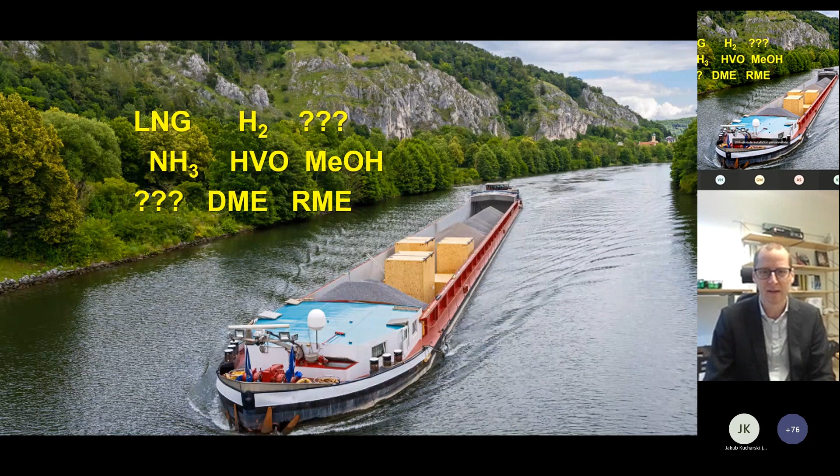Very quickly introducing myself, just to highlight some of the background this is coming from. My name is Sebastian Verhelst. I'm a professor at both Ghent University in Belgium and Lund University in Sweden. I did my PhD on hydrogen engines, but we also worked on renewable fuels such as methanol, ethanol, straight vegetable oils, biodiesels, animal fats even. Basically anything that will burn in an engine and has a renewable origin, we've looked into, just to give you a view from a fairly broad background.

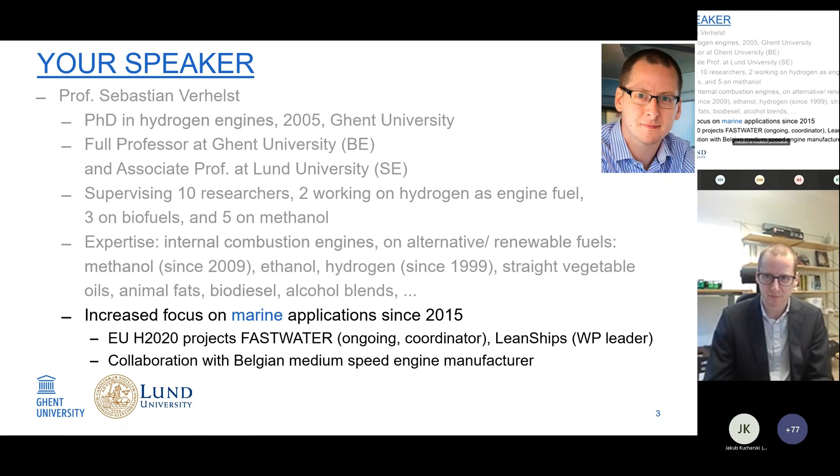Now, what do I have in store for you today? I don't want to throw a lot of data, a lot of studies at you. I would rather focus on a set of very basic tools and insights that I hope will serve you right, to be used as base criteria. When there's yet another alternative popping up, how do you place that versus the others? With just a couple of base criteria, you can already get quite a long way.

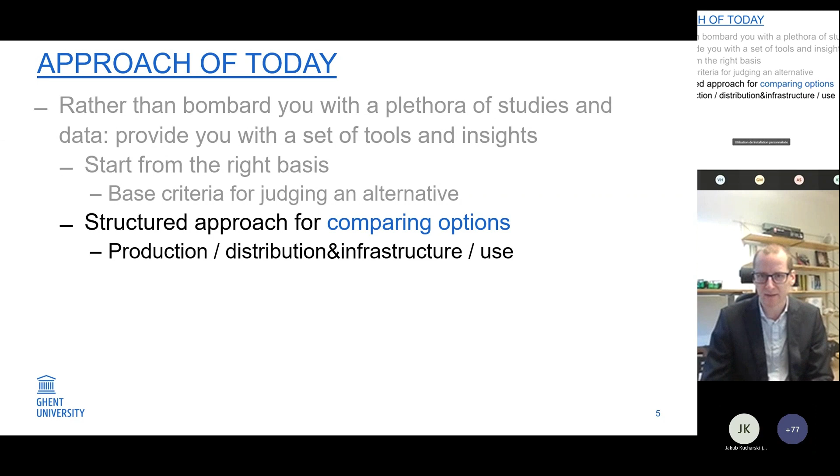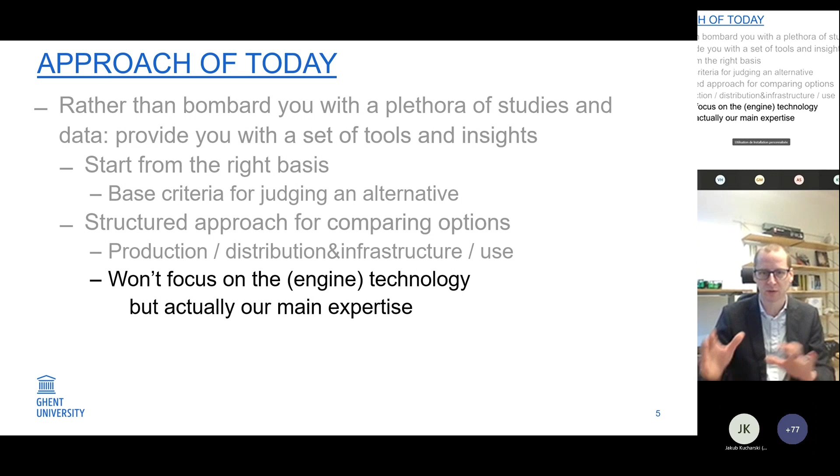So I will be putting forward a structured approach for comparing options, and I'll go into that in detail. I won't be focusing on engine technology, which is actually our main expertise - I'm an internal combustion engine guy - but these days you have to be very aware of what the fuels world is doing and what the energy world is doing. So this is how it all ties in. And rest assured, this is purely objective, I hope, so there's no commercial interest here whatsoever.

So let's get started, and let's get started from the basics. We've already heard it a couple of times today: why are we here? We want to set out the path to sustainable shipping. That means, to me, that we really need to think long term. Although long term, as we've heard, is getting closer and closer, still it's important that we look ahead, think about where we need to end up, and that we think big picture.

For shipping, for example, we will need an energy source - now we know that as being a fuel - or renewable energy sources. We need an energy carrier, and we need an energy converter to power our vessels. So if we think long term, we need all of these three things to match a number of base criteria. One obviously is that all these things should be sustainable. So the energy source that we will be relying on in the distant future, or maybe not so distant, to power shipping, must be gotten from renewable energy sources such as solar, wind and bio. But also importantly, everything that goes into producing an energy carrier - a fuel, for example - or an energy converter, be it a fuel cell, an electric drive, or a combustion engine, all of the materials that go into making these things, we need to make sure that they are used in a closed cycle.

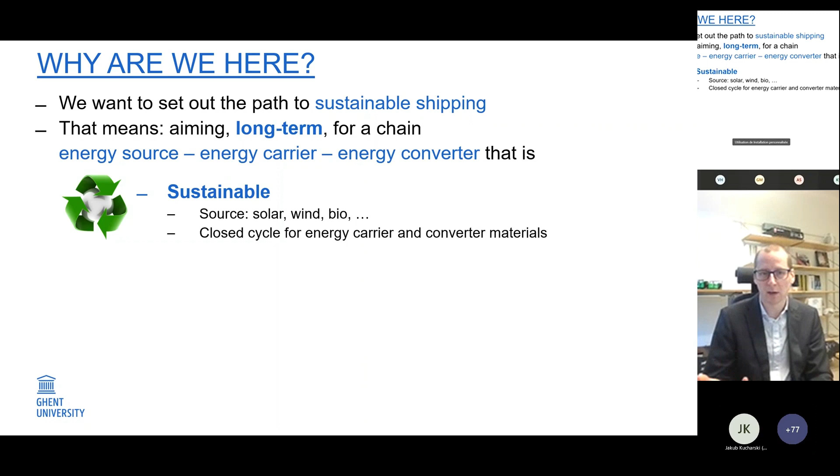That is not enough yet. Sustainable is a very important criterion, but equally important is scalable.

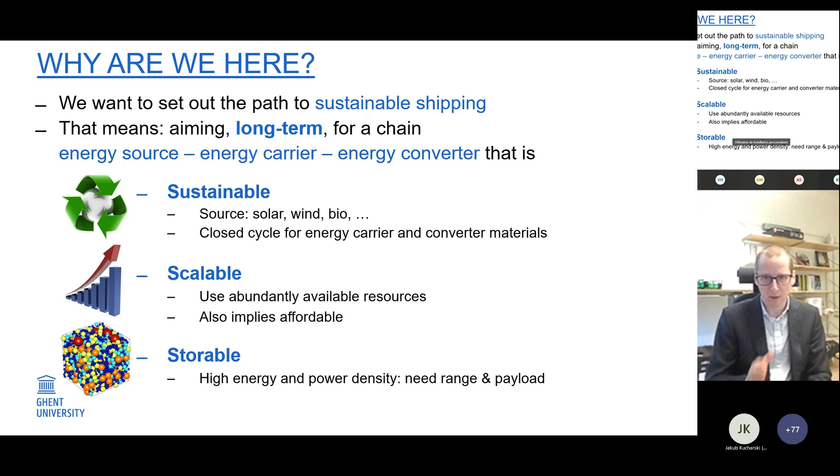We know about the tremendous challenge we have ahead of us. All of the materials that we're going to need to build these things, these fuels, these engines, these ships, we have to make sure those materials are abundantly available, because that goes hand in hand with affordability. And as soon as you're talking transportation, obviously storability is very important. We need high energy density of the energy carrier, of the fuel. We need high power density of the energy converter, because we need to ensure range and payloads. So sustainability, scalability, storability sounds very simple, just these three criteria. That's what I call my triple S criteria to assess any option, but that gets you quite a long way. And I'll touch on some examples of that.

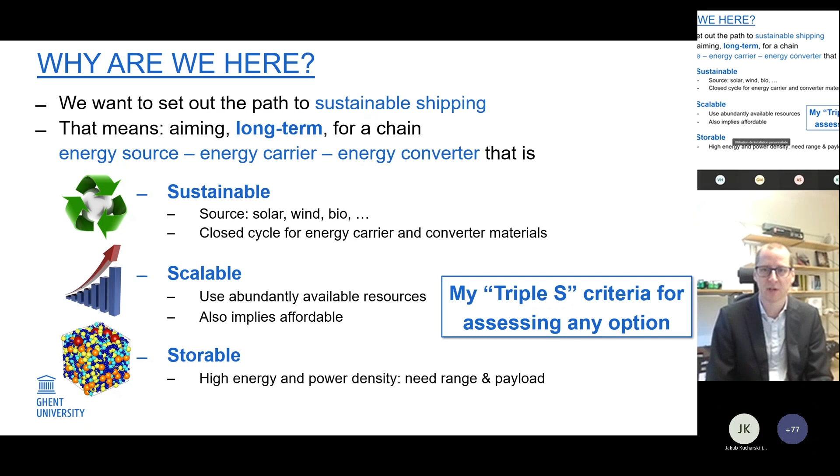So first one of this chain was energy source, and first criterion is sustainability. So let's check sustainable energy sources. Well, we know what those are. We know that we have biomass, hydropower, tidal energy, geothermal, wind, and solar.

Now let's think of the second criterion: what's the scalability of these things? It's very important because we need to know in which of these things to really invest. If we look worldwide at the maximum potential of something like biomass, we get to the order of 7 terawatts of continuous power that we would be able to generate from that. That's a huge number, and a number that is meaningless to us unless I give you a benchmark figure. The benchmark figure is that we're currently at around almost 20 terawatts worldwide of power that we're using. So biomass can contribute to that, but it's quite some way short of what we actually need.

Hydropower is a very similar number, also about 7 terawatts. And in this case, we're just looking at the theoretical potential, not currently worrying about what that would mean for nature or for moving people or whatever - just the theoretical potential, because that gives us some pointers. Tidal, order of 14 terawatts, geothermal, order of 44 terawatts. So both look quite attractive, but both are also quite challenging to harvest. They're pretty harsh environments, quite dispersed environments, so not as easy to make use of.

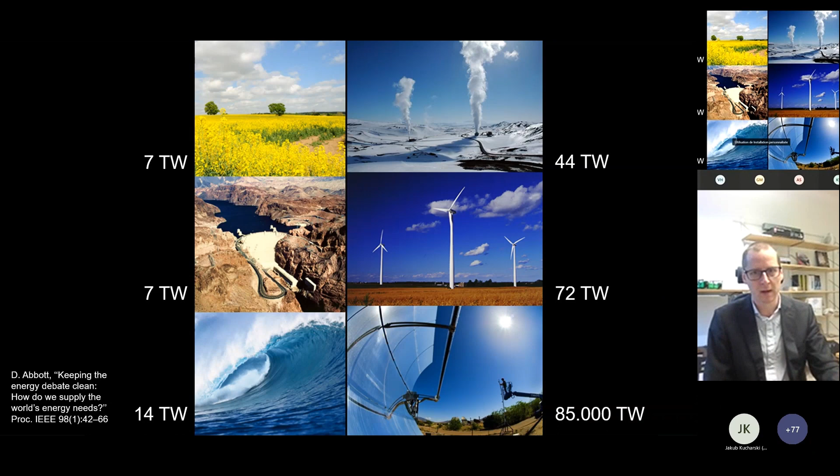Wind is getting really interesting - that gives us 72 terawatts, so that definitely justifies all the large offshore projects, for example, we've seen come online in recent years. And then let's look at solar. Solar worldwide could give us something of the order of 85,000 terawatts, which obviously is no surprise given that all the other renewable energy sources I stated here, apart from tidal and geothermal, are basically just highly diluted forms of solar energy. So that is not saying that we shouldn't make use of biomass and tidal - we should definitely do that where it makes sense. But in the long run, if you think renewable energy sources, the base load will have to come from solar energy.

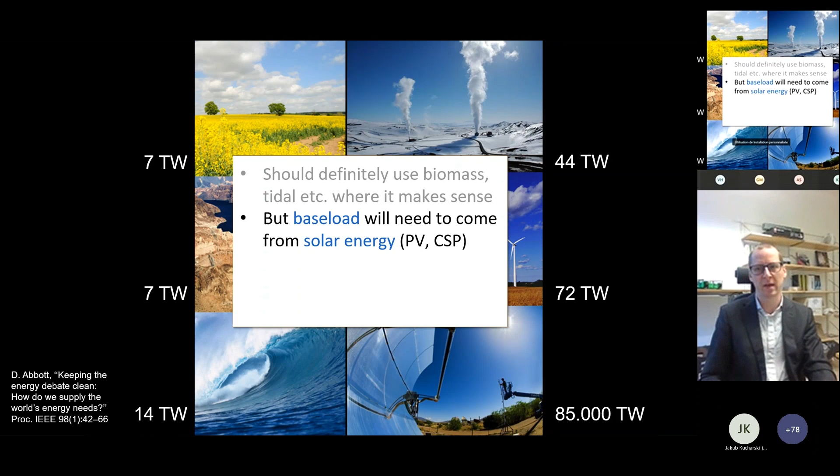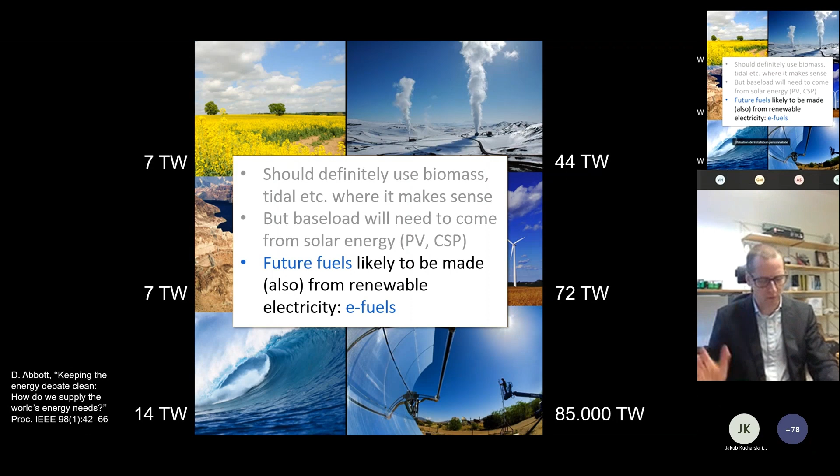And why am I telling you all of this? This seems very, very remote from inland waterway transport. Well, because future fuels will likely have to be made from the renewable energy source that is most scalable. So it seems that renewable electricity is going to be the most scalable renewable energy source. And thus, if you link fuels to that, we come to the topic of e-fuels, electrofuels. So that's still a vague category - a fuel made from green electricity.

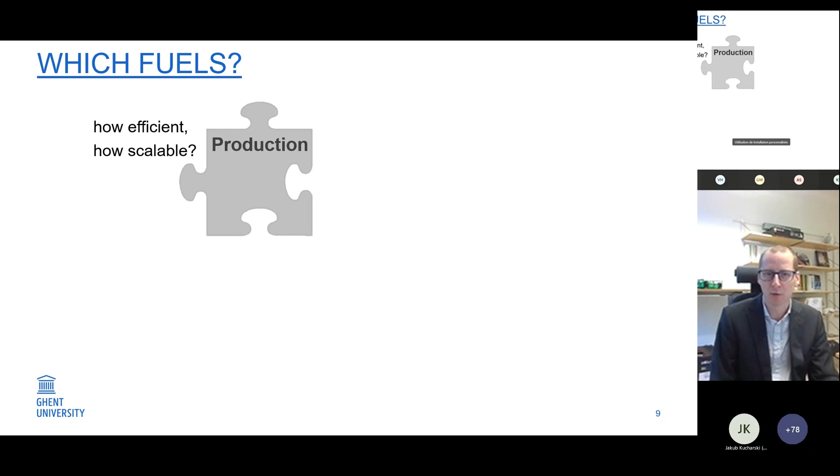But which fuels should we then be looking at? So the first tool that you can use there is to realize, or to think about, the life cycle of a fuel or an energy carrier. Obviously, you have to produce it, so then it's very important that you check how efficiently you will be able to produce that fuel and how scalable you can do that. Once you have the fuel or the energy carrier, you need to transport it to where you want to make use of it - so from the production location to the point of use. A very important property there of the fuel or energy carrier is its energy density. And I'll give you some examples in a minute.

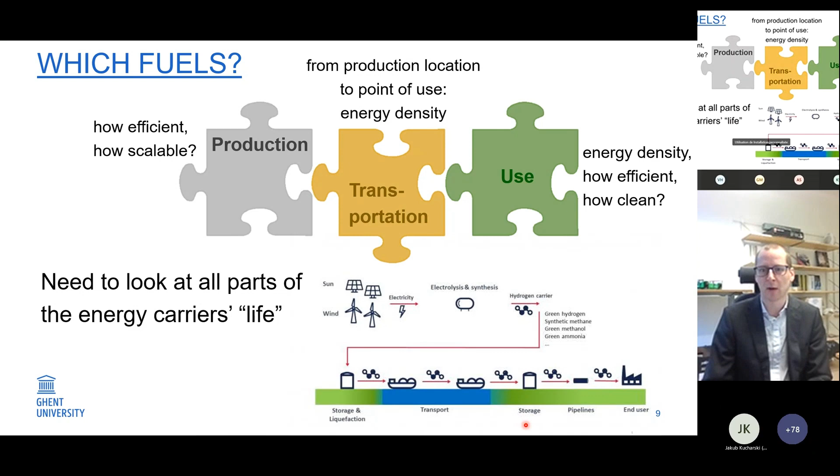And then finally, of course, what today is mostly about: which energy carrier do we want to use? There also energy density is very important, besides obviously how efficiently we can convert the fuel's energy to motive power and how clean we can do that. So just always keep this in mind with every new alternative that pops up, that we need to look at this entire life cycle - from the renewable energy source, over producing the energy carrier. Here you see a couple of them already mentioned: green hydrogen, synthetic methane, green methanol, or green ammonia. We can have different forms. We need to make it into something that is storable, transport it, store it, so that we can then bunker ships, for example.

So let's look at each of these pieces of the puzzle in turn. First piece of the puzzle: how will we produce those fuels, or what can the production insights tell us about which fuels to focus on?

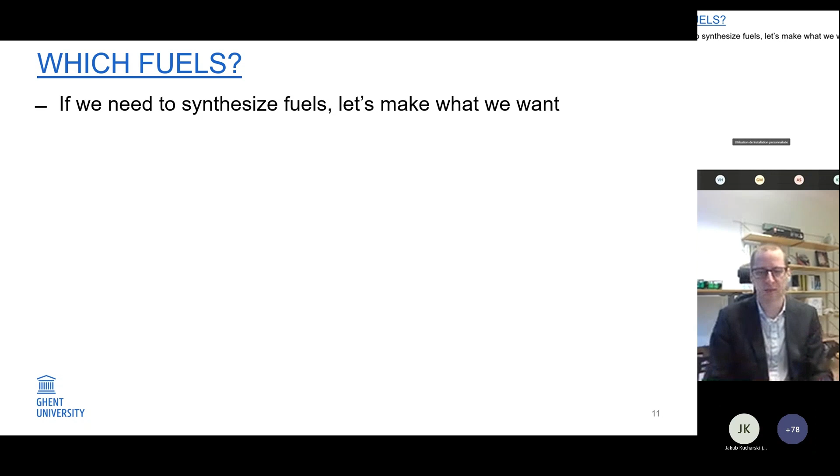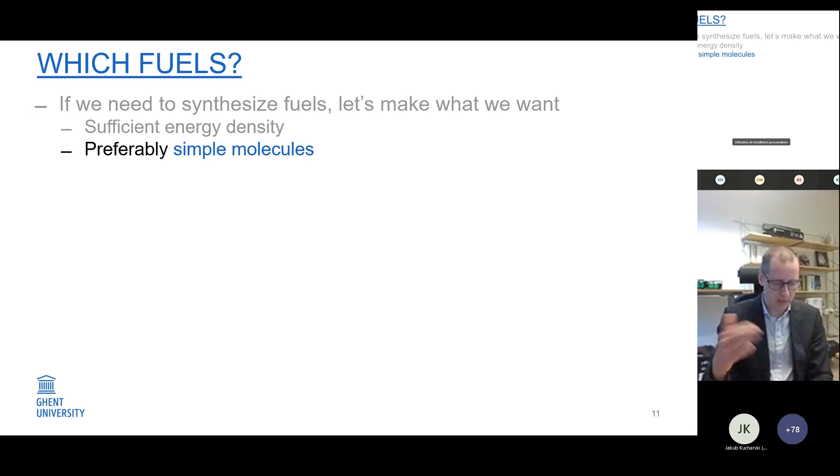First thing to keep in mind, if in the long run we will need to synthesize fuels, then let's make what we want. Energy density is a very important one for transportation. But next to that, we should preferably be looking at simple molecules. There's a reason for this typical short list of hydrogen, methane, methanol, ammonia - production is more efficient. If you think of the life cycle of the energy carrier, this is about the well-to-tank part of the equation. Let's try to make that as efficient as possible.

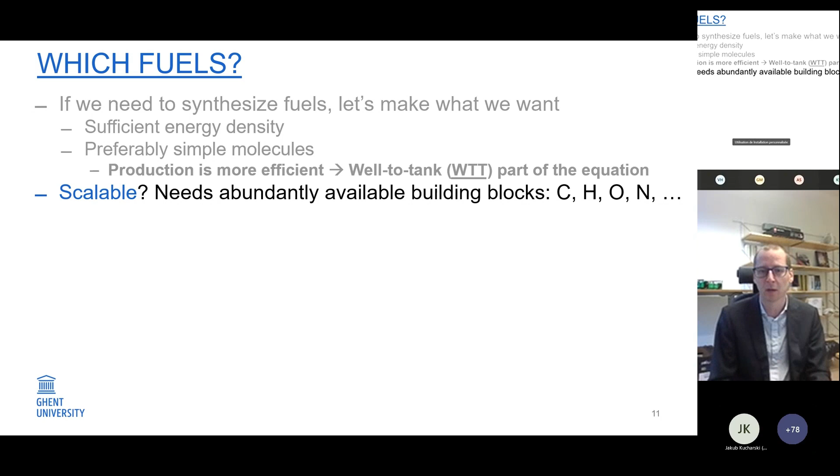Second criterion: what about scalability? What can we actually make? We have to look for things that we have abundantly available - carbon and hydrogen, oxygen and nitrogen, things abundantly available in the atmosphere or in the Earth's crust, and start looking what type of fuels we can make with those. So it's logical that you first end up with something like hydrogen, or hydrogen derivatives - methane, ammonia, methanol, or dimethyl ether.

And the list continues - you can also make things like green diesel, as some people are doing, but you can also see that the molecules are becoming more complex. The more complex molecule, if you want to build it up from scratch from the building blocks, is going to cost more energy. So it will become less and less efficient.

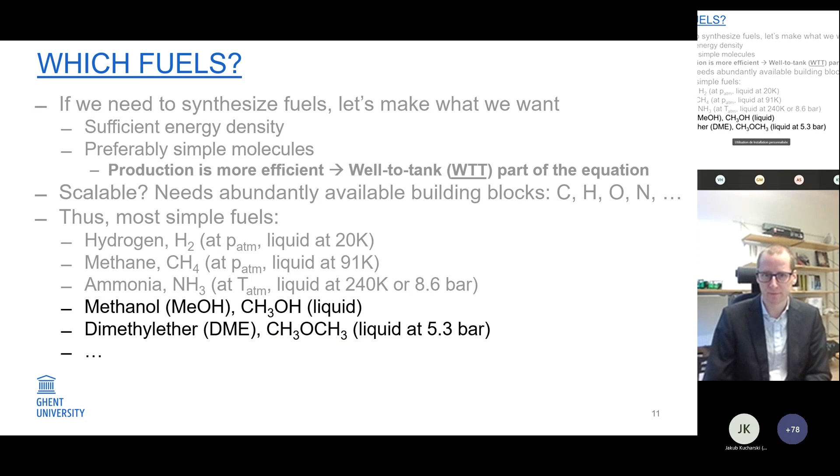So how to actually compare this list. One important distinction: some molecules have carbon in their structure, some don't. A very important question is, simply put, to carbon or not to carbon.

This is a pretty complex graph that I won't lead you through - I'll just point out some things. This is about converting renewable energy sources ultimately to fuels. We have ammonia here, hydrogen, methanol, methane here. For the ones that use carbon, we will also need some carbon capture. So how do these options compare - building fuels from the building blocks using carbon or not?

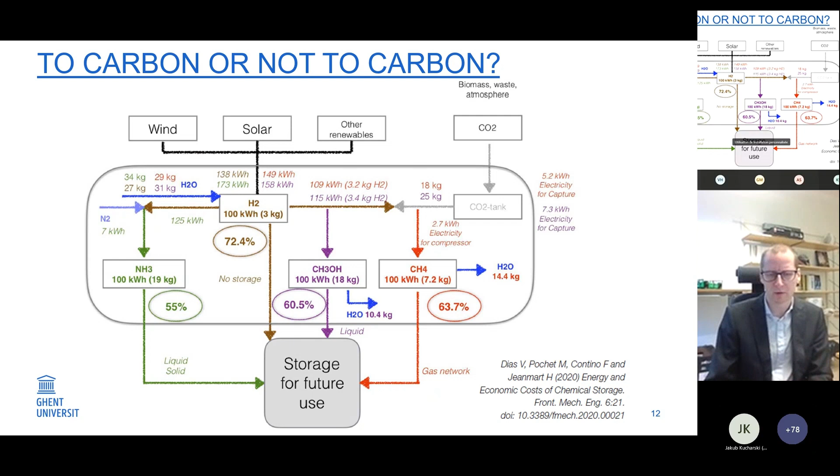So what about the production efficiencies? There were a whole bunch of numbers in that slide. The interesting thing is, if you start comparing the production efficiencies, the carbon capture does not come for free, but it's actually only a minor part of producing the fuels. It's actually the first step, producing the hydrogen, that is the biggest energy chunk. I've illustrated that here with a well-to-tank energy breakdown of synthesizing methanol.

You see that the big chunk really is electrolyzing water to produce hydrogen. That's about 70% of the energy you need to produce methanol, as the example here. Obviously you need energy to extract CO2 from the atmosphere, and the other processes to build the fuel. But surprisingly, it's mostly producing the hydrogen.

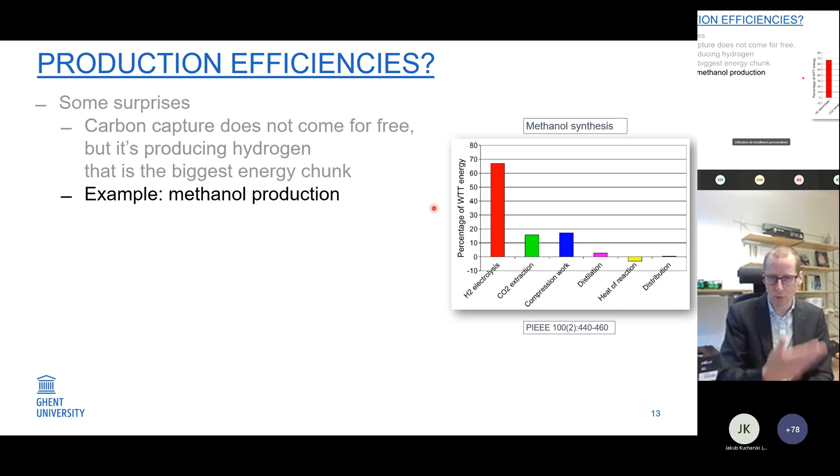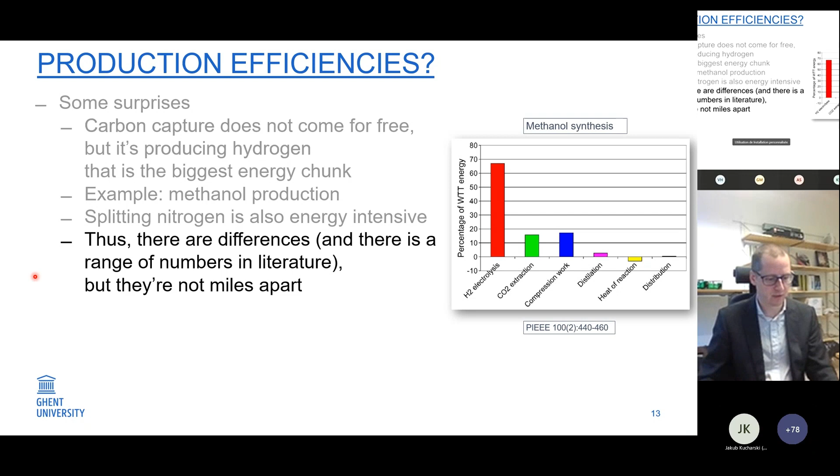So if you think of ammonia, one of the other options - nitrogen, which is abundantly available in the air, you would imagine is easier to use as a hydrogen carrier, but splitting that very stable molecule is also very energy intensive. So the differences between producing methanol, methane, or ammonia exist, but they're much smaller than you would think. Probably a more important question, whether or not to include carbon, is the future price of carbon, which was also just briefly touched on.

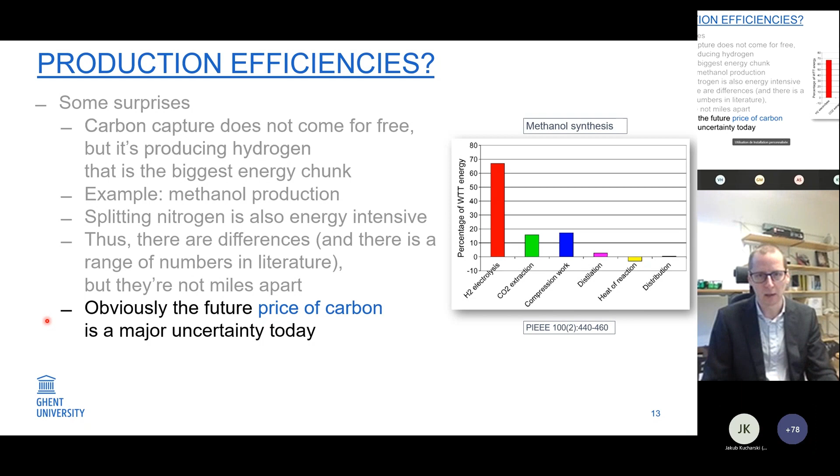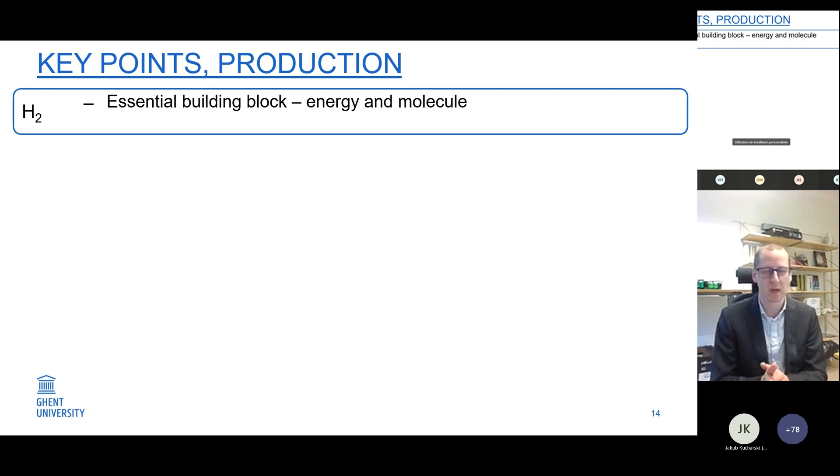So if we compare the four options concerning production - something like hydrogen, which is fairly easily produced from renewable energy sources in a fairly straightforward manner, you can say this is really an essential building block. Green hydrogen is definitely going to be part of a future society relying on renewable energy. Question then is in which form - we will use it in the energy system, and as a molecule for the chemical industry. Producing it compared to the other fuels is the most efficient way, because that's the first step you take anyway, but it's not the only thing you should be looking at, which I'll come back to.

Something like ammonia, you don't need carbon, so that's a big point of attraction. It's also something we have quite a lot of experience with - it's one of the top 5 chemicals worldwide, so as a chemical product, it's quite mature.

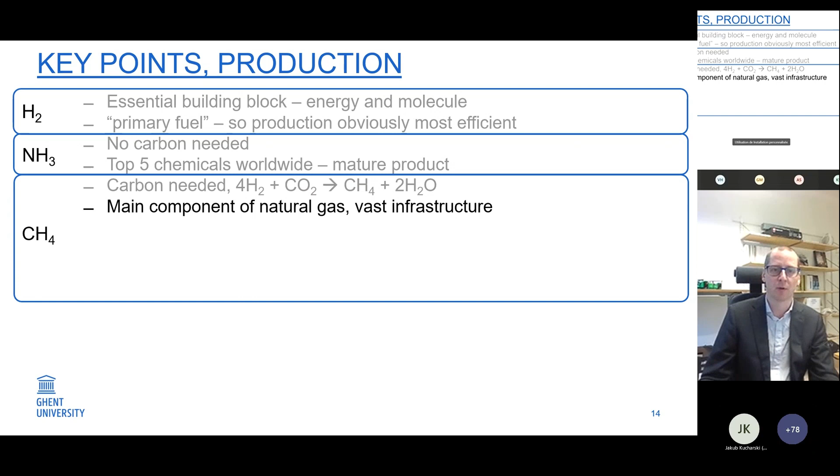Looking at production of something like methane, we need carbon, so we're making use of CO2 to bind the hydrogen into something more easily handled, such as methane. That's something we know very well, because it's the main component of natural gas, and we have a vast infrastructure for that.

But there's a big question mark on the competition that's going to develop for sustainable carbon. Chemical industry needs carbon compounds, and aviation is also vying for the most energy dense fuels. So there's uncertainty on carbon price. There's a lot of development on carbon capture and utilization, on direct air capture, but there's still a lot of experience to be gotten before we get more information on the actual price.

In Europe, if we look at road transportation, carbon fuels are out. The legislative framework only focuses on tailpipe emissions. Keep in mind that a zero emission vehicle is a purely legal definition, so be aware of what you're talking about when mentioning that. If you draw your control box around the vehicle, then of course if you have no tailpipe, you have no emissions. But if you look at the life cycle, it can be a completely different story.

In the marine sector, luckily, the focus now is on well-to-wake greenhouse gas emissions, so a carbon neutral fuel is definitely an option there.

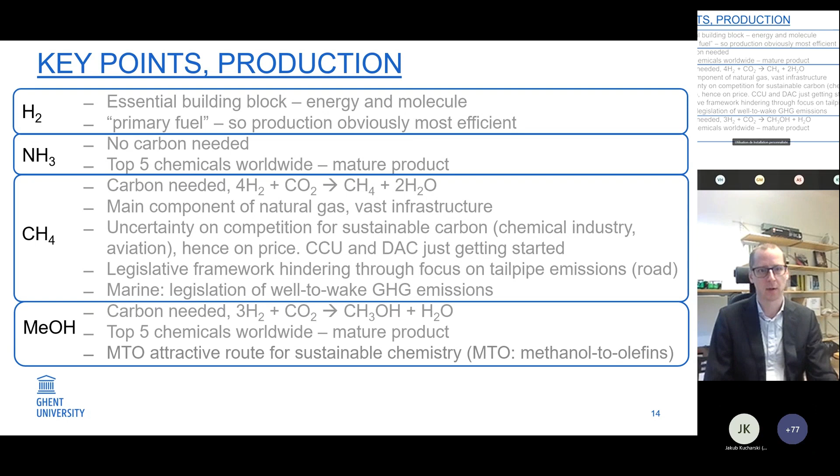Looking at methanol, you again need carbon to produce it. It's also something we're very familiar with, one of the top 5 chemicals, so a mature product. Beyond its fuel use, through the methanol to olefins route, it's quite attractive for converting our chemistry sector from petrochemistry to sustainable chemistry.

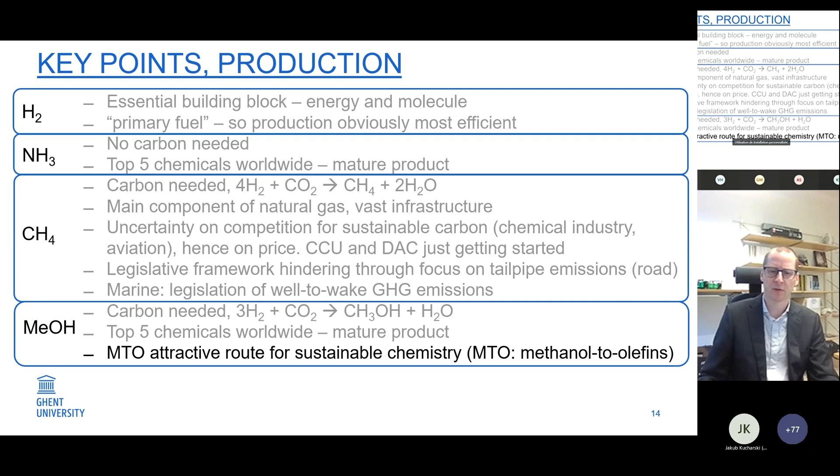Now I hear a lot of you thinking: okay, we have these fuels being pitched a lot for maritime transport. I'm not too sure for inland waterway if this is the best option.

What about biofuels? Short term, clearly something like biodiesel, rapeseed methyl ester, or hydrogenated vegetable oil are the most interesting options. Why? Because they're drop-in solutions—we can basically use the same engine and the same storage solution. However, with a focus on the long term, the expectation is that e-fuels will gradually take over.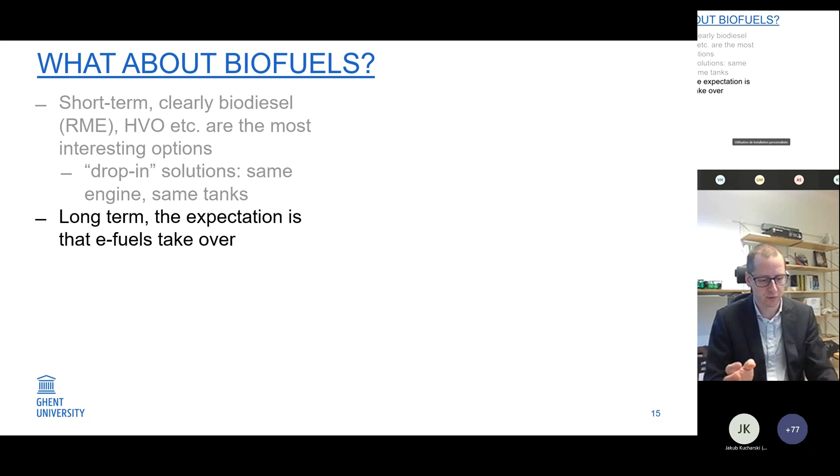The reason for that is twofold. One is, as I mentioned, the sustainability and scalability of renewable energy sources. Here's a visual representation of what type of green electricity you could get per year from 1 square kilometer of land. You can grow biomass on that land, or put wind turbines there, or put PV panels on there.

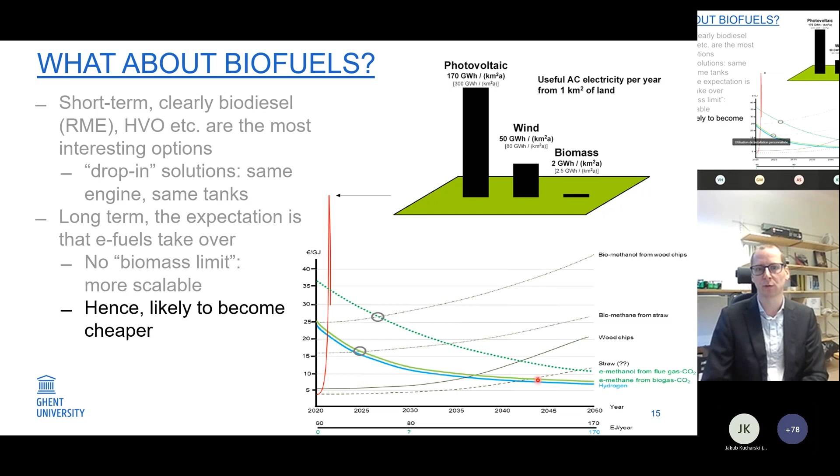Unfortunately, growing biomass is a very low efficiency process—photosynthesis just has very low efficiency. So per square kilometer of land, we can get much more energy in the form of green electricity than energy in the form of biomass. There's a biomass limit, meaning there's an inherent cap on the scalability of biofuels, which also goes hand in hand with affordability. So the expectation is that initially biofuels, since we know the product, are cheaper than e-fuels, but in the long run e-fuels will probably become cheaper than biofuels.

So now we've looked at the production end of things—we need to produce energy carriers, fuels to power our transportation. Then we need to distribute, store, and bunker fuels. We don't know yet where production will happen—that will happen in various places worldwide, but we know the places with the cheapest renewable energy sources aren't really in Europe. So there's a very likely possibility that we will also import fuels, and we'll have to think about the fuel infrastructure.

We can use that to think about whether we're going to look at hydrogen or ammonia, or methane or methanol, for example. Are we going to look at hydrogen itself, or is a hydrogen vector going to be more attractive?

So that's quite surprising, that almost anything is better at storing hydrogen than hydrogen itself. This explains why there's so much interest in these hydrogen carriers. And this is just the fuel itself. It doesn't stop there, because if you have liquid hydrogen, you need something to contain it, a storage system.

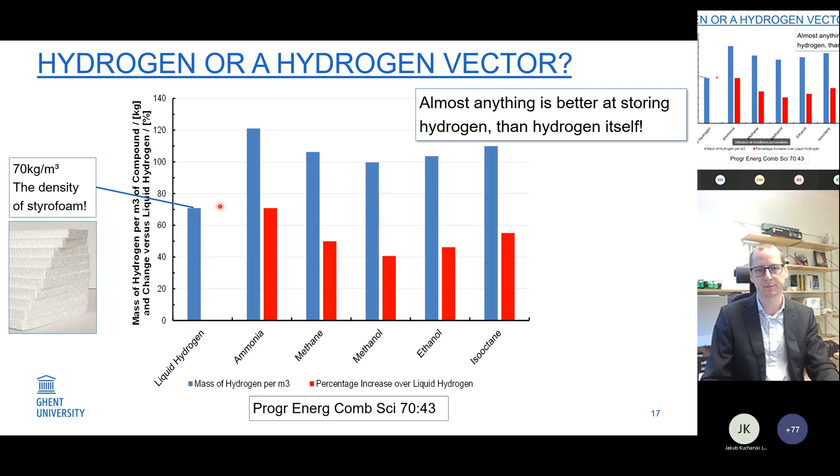If you look at the heating value, the energy density in megajoules per kilogram of fuel, we all know that hydrogen is really attractive, containing a lot of energy per kilogram. We're talking 120 megajoules per kilogram compared to maybe 42 or 43 for gasoline and diesel, so 3 times higher almost. That seems very attractive.

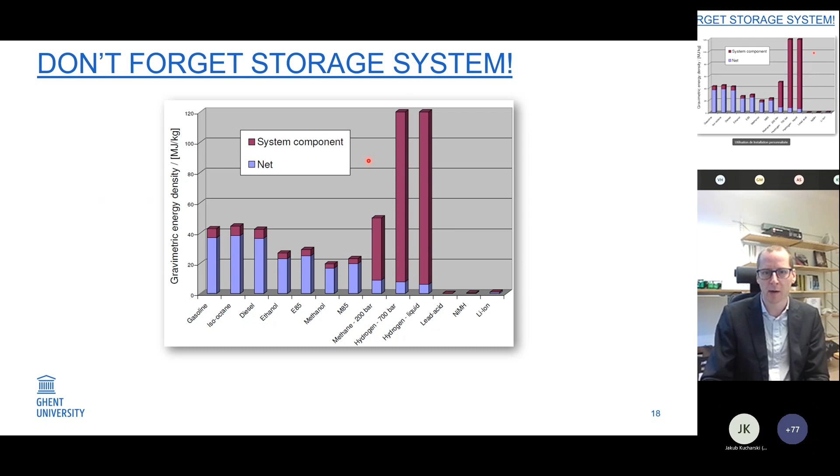But we mustn't forget that carrying hydrogen is really challenging. For gases, whether it's methane or hydrogen under compressed form at 700 bar, so very high storage pressures, or liquefied form, we go from this 120 megajoule to ultimately a much lower value, because we have to count the fuel storage system, the tank basically. For a hydrogen compressed tank, the tank weighs way more than the hydrogen it can actually contain. Similar thing for liquid hydrogen.

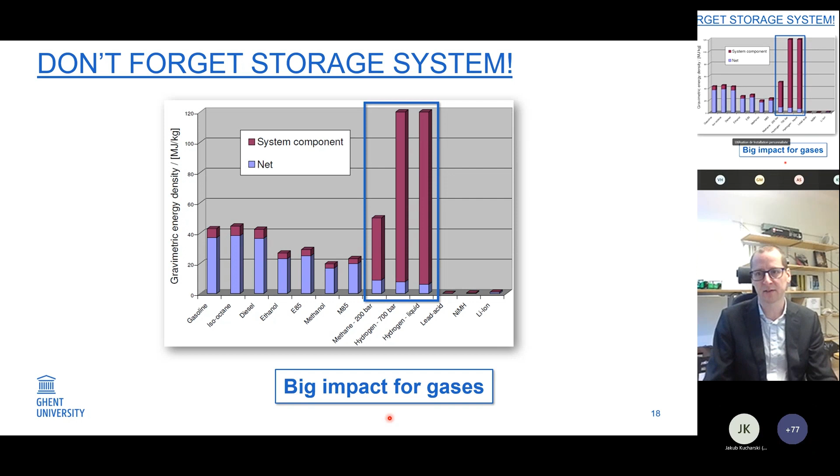So be very aware that as soon as you're looking at gaseous fuels, that you count the storage system in here. That means that for the fuel infrastructure, the ease and costs linked to distributing, storing, and bunkering fuels is very strongly linked with energy density. That's always one to really look into. I will touch on that again in the next section, because the use is also very heavily impacted by that.

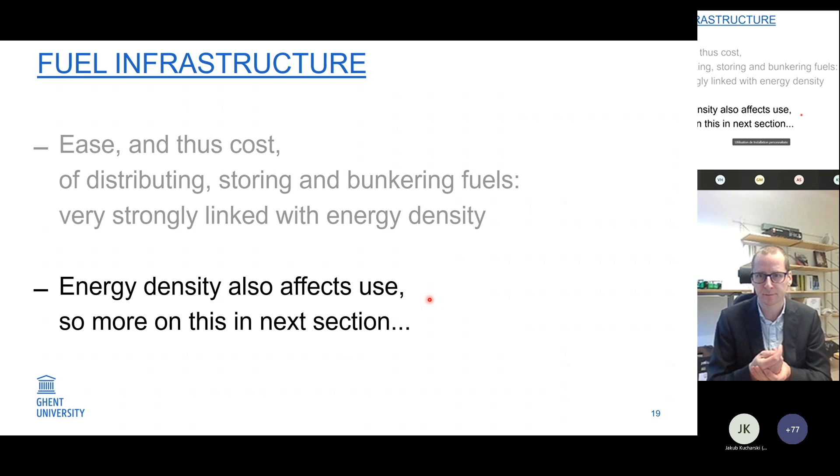So let's dig into actually using these fuels. There's a lot of criteria that come into play here. There's a lot of studies, mostly focusing on cost of production, that don't touch yet on the differences in use of these different fuels.

That's really important. One is, of course, the conversion efficiency. Once you have produced the fuel, with which efficiency are you going to convert back to power? One is pollutant emissions. What about air quality, soot and NOx emissions? Does the energy carrier have a global warming potential? What does the onboard storage look like? What's the safety? What's the technology readiness level of the energy converter? Do we have engines or fuel cells that can operate on these things?

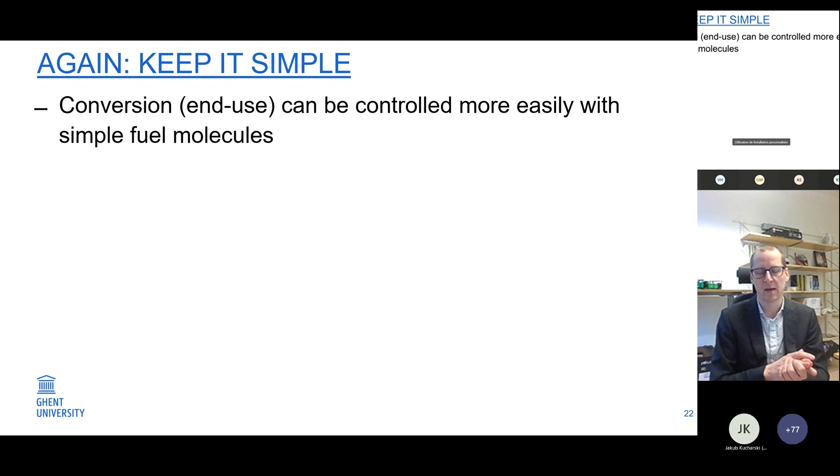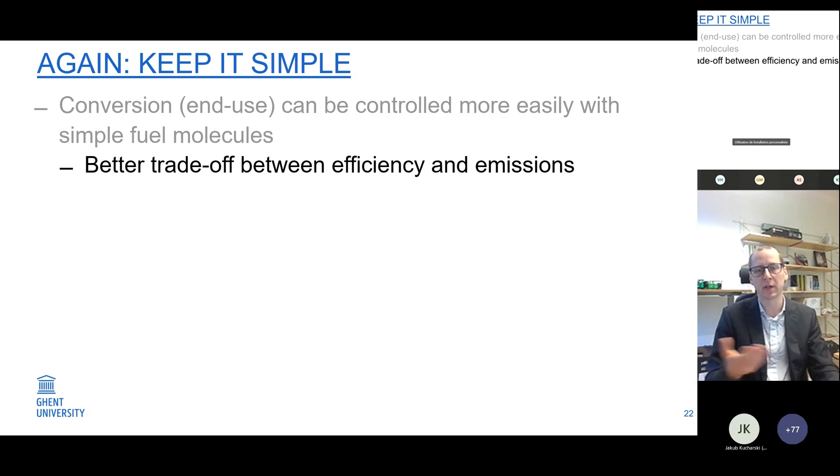So again, a couple of guidelines here. My view is it's very interesting if we can keep things simple. If we produce simple fuel molecules, our experience has shown that converting these things back to power can typically be controlled more easily. You can end up with a better trade-off between efficiency and emissions, or even better, if you choose things like hydrogen, ammonia, methanol, or dimethyl ether, you completely eliminate soot formation. You can't form soot from these things. So you don't have to worry about a trade-off between your engine efficiency and soot emissions.

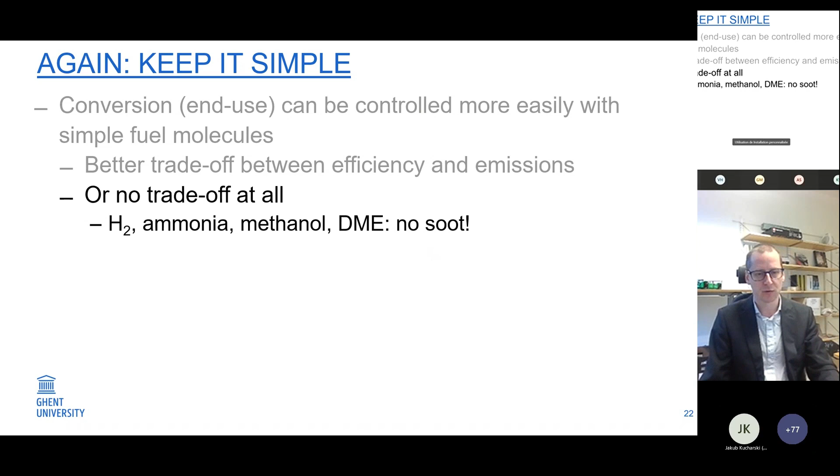So this is the tank-to-wake part of the overall well-to-wake equation, which is also very important. If you think about using and storing this on board, something that is liquid at atmospheric conditions greatly simplifies the ship design, and maximizes your range and payload. Again, energy density, a lot of these things come down to that.

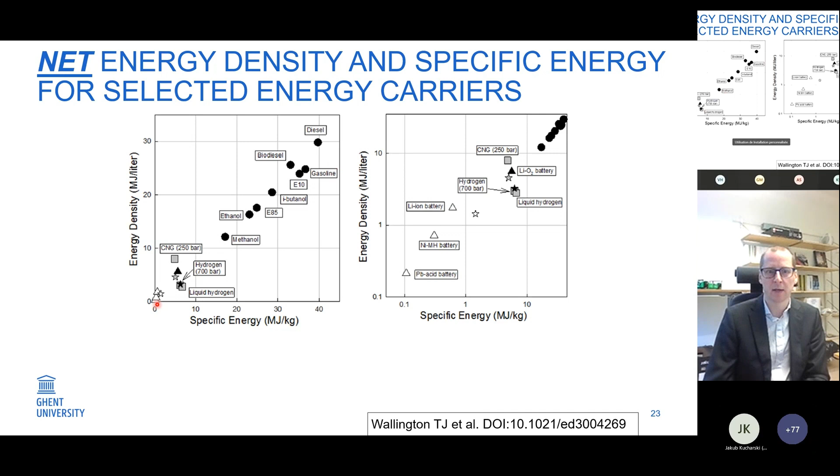So let's look at some energy density and specific energy numbers for some energy carriers. Let's just look at the left plot here. This shows on the y-axis the energy density in terms of how much energy you have per liter of volume needed on board your ship, versus on the x-axis, how much energy you carry per kilogram of the energy carrier you're hauling along. We won't go into details here, again this is about providing insights.

Very easily, you can see that clearly liquid fuels outscore others by an order of magnitude, and there's a reason why we're using liquid fuels today. Whether you compress CNG to 250 bar or hydrogen to 700 bar, or you liquefy hydrogen, yes, you make it storable, but you still see this order of magnitude difference in energy density between something that is a gas at atmospheric conditions and something that is a liquid.

We've heard batteries mentioned briefly. Well, the gases are still an order of magnitude better than batteries. That's why there's another graph here on a logarithmic scale, to see some distinction between battery chemistries. Battery electric shipping is possible, but this will only be able to serve niche applications.

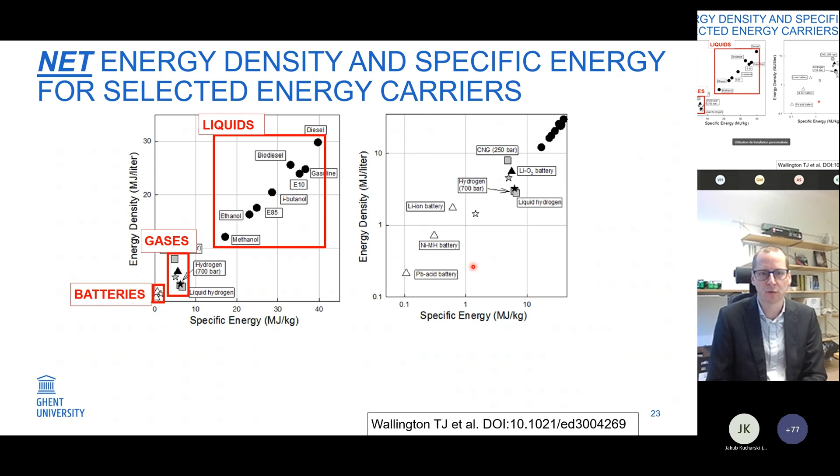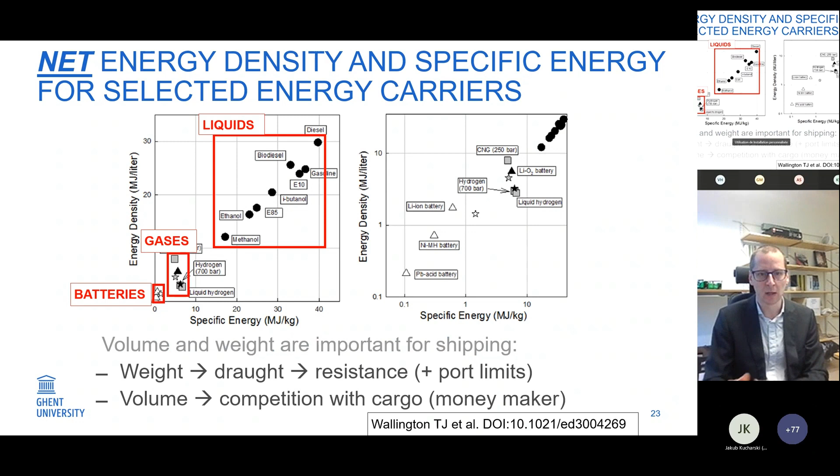For the bulk, we really need the energy density of a fuel, and obviously volume and weight are important for shipping. The weight will affect the draught, will affect the resistance, and might prevent us from entering ports. The volume will directly compete with cargo, which is how we should earn the money.

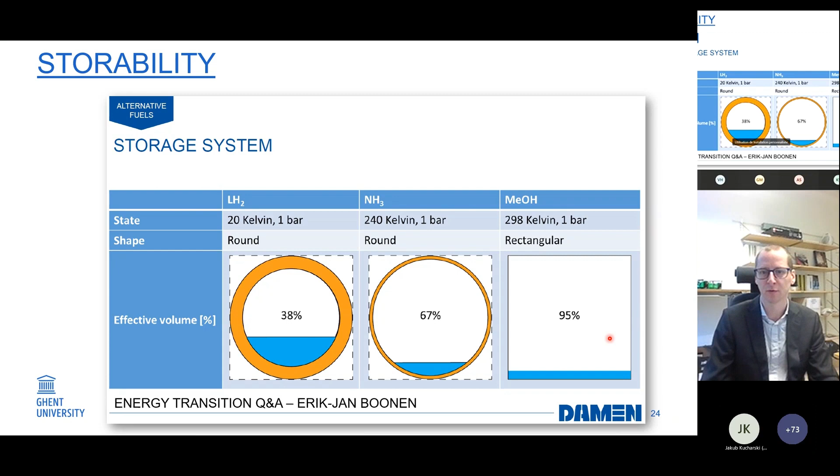If you go for something that is liquid at atmospheric conditions, such as methanol, basically the space you have available on board for fuel will almost entirely be usable for storing that fuel. So let's look at our four prime fuels again - how will we use them?

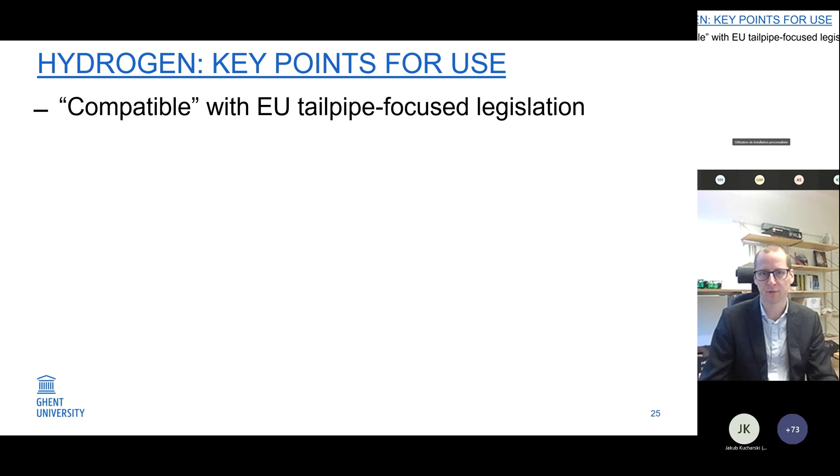For hydrogen, it's very compatible with the EU legislation that is tailpipe focused for road applications, but the big catch here is the very low energy density. That makes handling the fuel, storing the fuel, very difficult, very inefficient. So you're introducing inefficiencies all along the chain, and introducing costs like that.

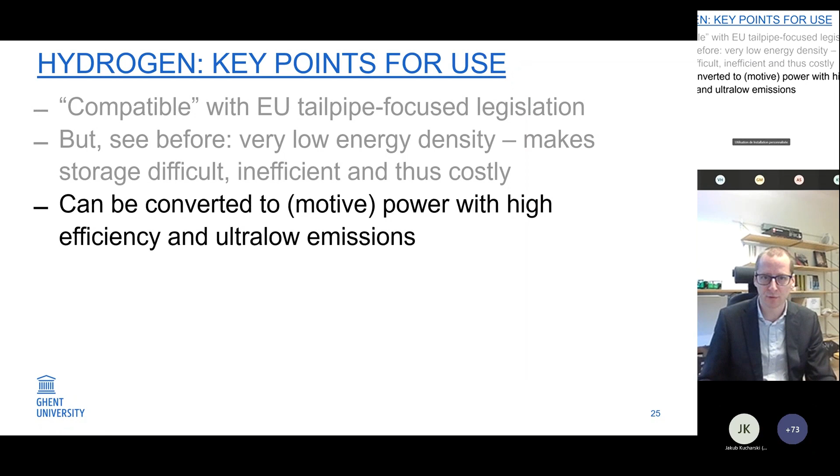Of course, once you have the hydrogen on board, you can convert that to power with high efficiency, with ultra low emissions. Even if you're using combustion engines, the only thing you have to consider is emissions of nitrogen oxides and emissions potentially of unburned hydrogen. NOx emissions can be controlled relatively easily.

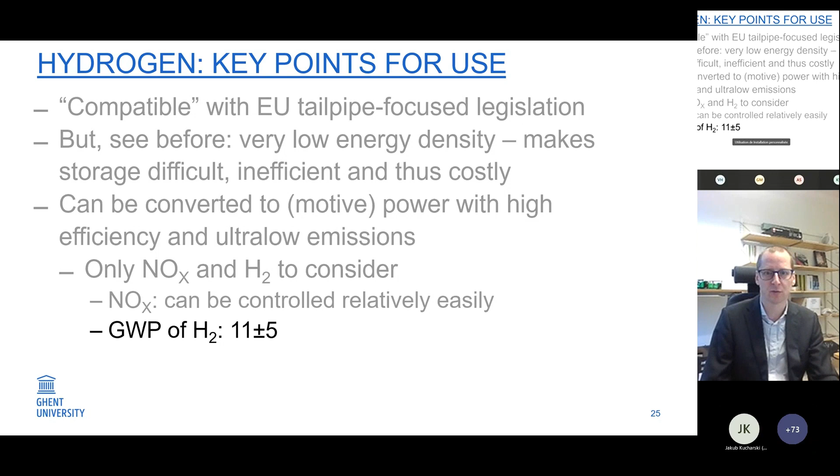Why am I mentioning hydrogen explicitly here? Because hydrogen also has a global warming potential. That's something that recently was made clear - that hydrogen does have a global warming potential. It's 11 times as potent as CO2 as a greenhouse gas, and the effect is that of an indirect greenhouse gas. You can imagine there was quite a bit of an outcry when this study became available.

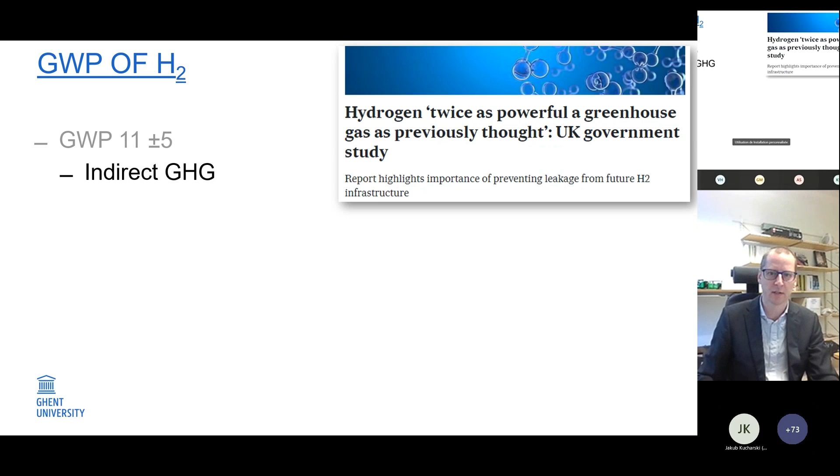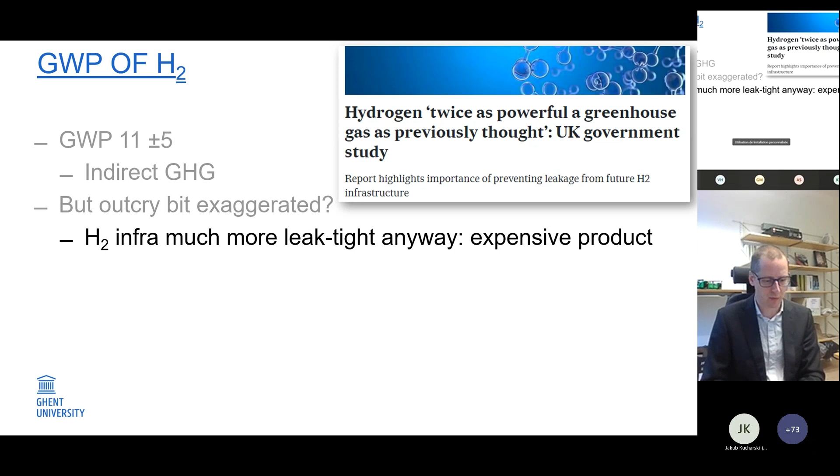My personal feeling is that that's a bit exaggerated, because the hydrogen infrastructure that we're going to be building up, the expectation is that this is going to be much more leak tight than, for example, the natural gas infrastructure we have today, because it's always going to be quite expensive to produce the hydrogen. So we better make sure that nothing is leaking.

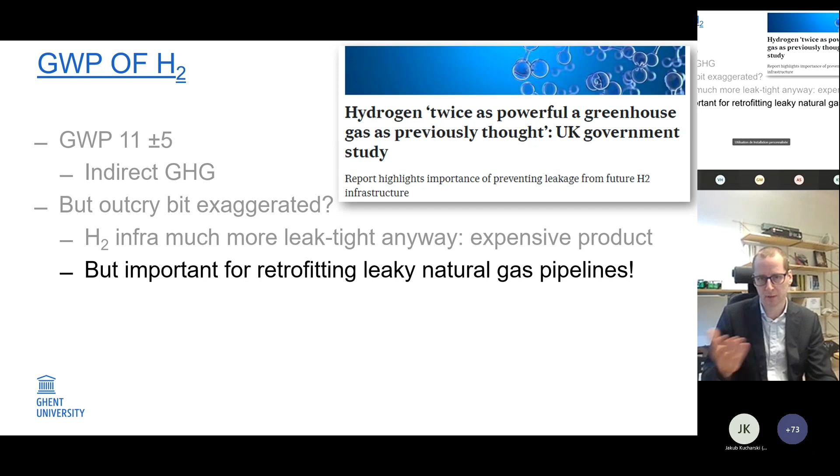Of course, if you look at schemes where people are thinking of retrofitting natural gas pipelines to also pipe hydrogen, then the leakage is something that definitely has to be looked into. And if we're thinking of shipping liquid hydrogen, where we could end up with boil off, then definitely that's something to be very aware of.

What about ammonia? There's a number of question marks concerning use of ammonia. There's a bit of an ammonia hype currently, mostly in the ocean-going world. That's an extremely toxic compound, toxic both to human and marine life. It's a gas at atmospheric conditions, although we can relatively easily liquefy it, but still, that has safety and cost implications to go with it.

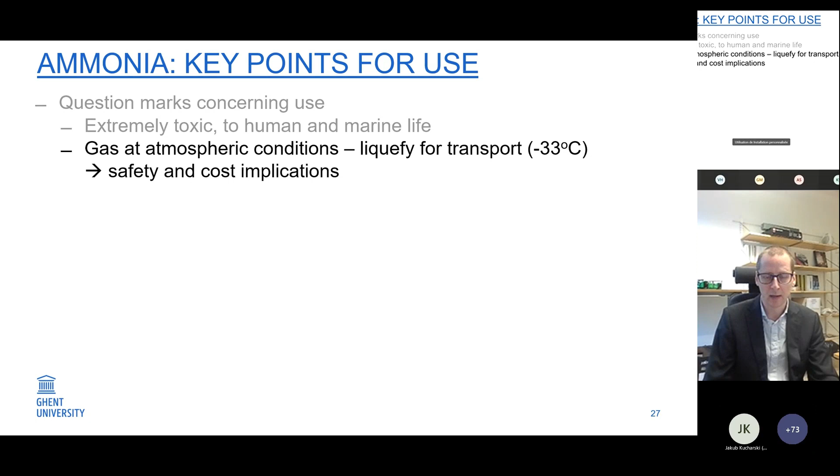And if we have a nitrogen-based fuel such as ammonia, obviously nitrogen emissions are going to be a concern. One thing we are not fully aware of is that we can also start forming N2O, laughing gas, which is an extremely potent greenhouse gas - almost 300 times as potent as CO2. The worry is that we have no idea yet how to deal with them. We've seen test results where the N2O coming after the after-treatment is actually higher than the N2O engine out. It's also quite difficult to burn.

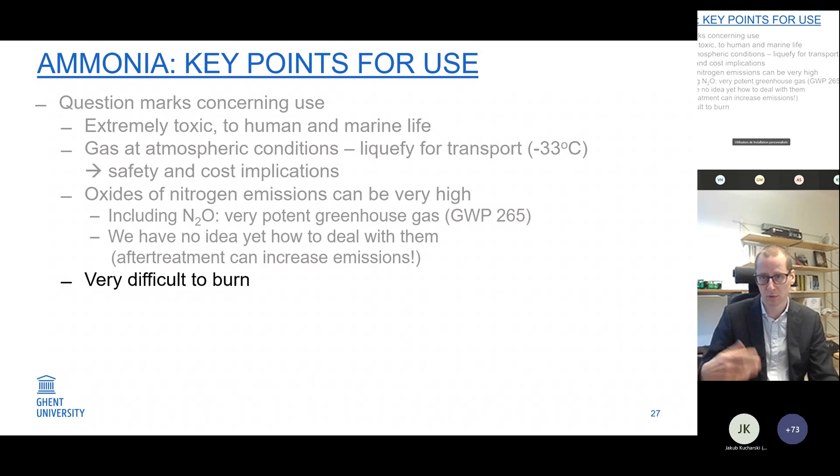Basically, it doesn't really want to burn well. So if you want to run on ammonia, you need to convert at least part of that ammonia back into hydrogen, which is a great fuel. So that's not looking very viable, I would say - definitely not for inland waterway. If there's one application where we could use it in the long run, it's the large two-stroke engines of big container vessels currently running HFO, which can basically burn anything, including ammonia.

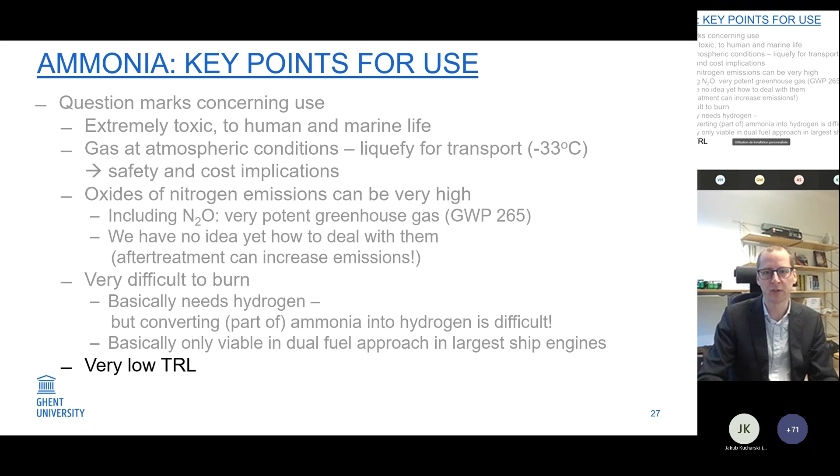Also important is to realize that we're at a very low TRL stage, very low technology readiness level stage here.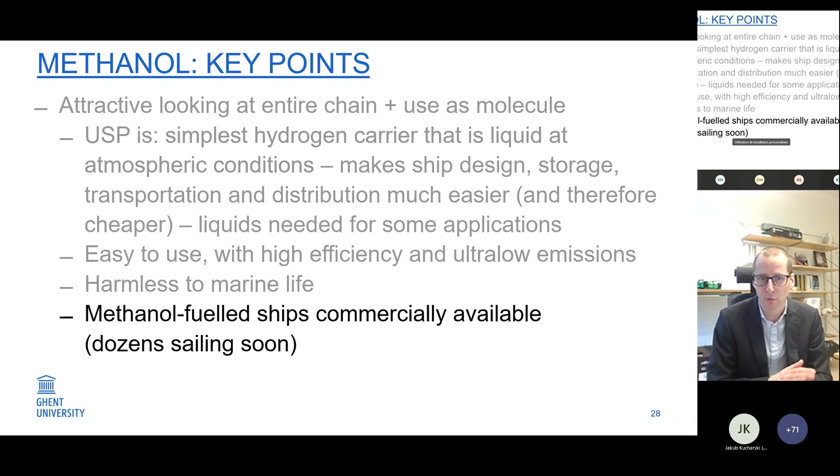For methanol, that's looking quite attractive, looking at the entire chain, and also remember this use as a molecule. The unique selling proposition here is that it's the simplest hydrogen carrier that is liquid at atmospheric conditions. And the fact that it's liquid makes the design of the vessel, storing the fuel on board, transporting and distributing the fuel much easier and therefore cheaper. So for quite a number of applications, we will always need liquid fuels, which also makes it easy to use. We also have a lot of evidence by now that we can do this with high efficiency and ultra low emissions. And interestingly, it's completely harmless to marine life. This is catching on - there's dozens of methanol fuel ships that are going to be sailing soon.

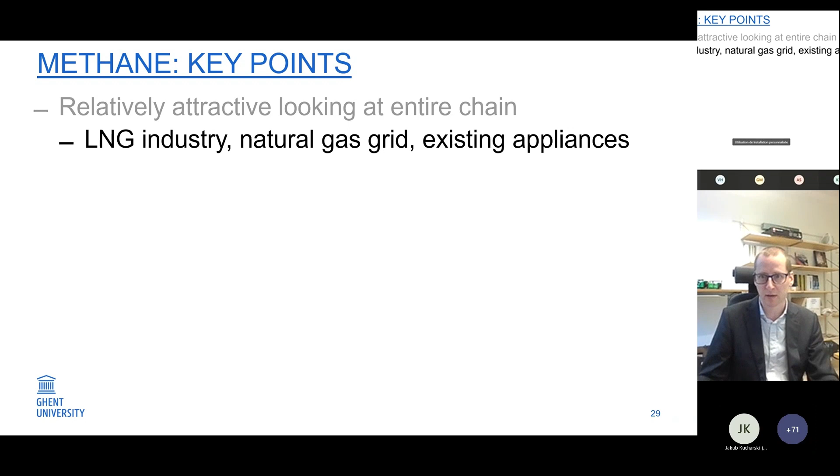What about methane? Again, quite attractive looking at the entire chain, because that's basically a mature industry. We have the LNG industry, there's a natural gas grid, and we have existing appliances and vessels. But remember, it's still a gas, so we won't be able to use that for any vessel, because of the challenges in transport and storage. And there's also increasing concerns on methane release before and at the point of use, methane also being quite a potent greenhouse gas.

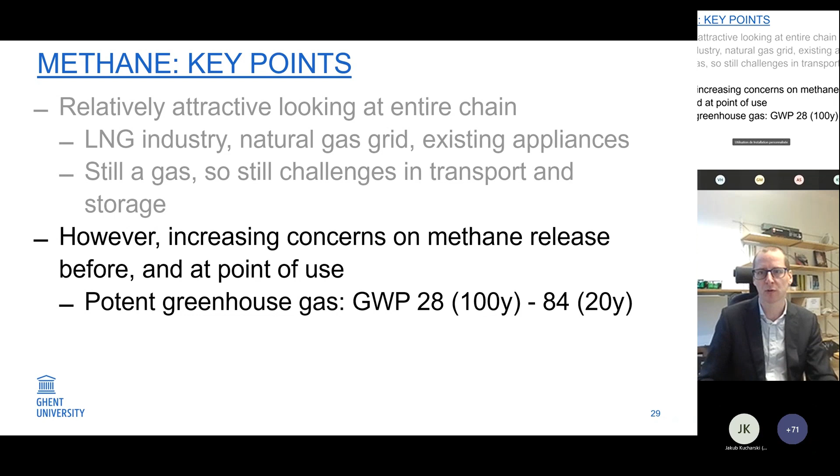Then finally, before we come to the wrap up, maybe some of you are also wondering: what about combustion engines? Will we still have combustion engines, or are we going to be transferring to fuel cells? Well, combustion engines remain attractive because they can run on all these e-fuels already mentioned, and they're sustainable and scalable technology. They're clearly scalable because there's 2 billion out there worldwide today. They're also sustainable because they're made of abundantly available materials, which are actually already being recycled today. So a very important message here is that we, yes, need to get rid of fossil fuels, but not necessarily of combustion engines. The combustion engines on methane, as you know, on LNG, are commercially available.

There's already engines out there commercially available for methanol. It's mostly work in progress with some engines now commercially available for hydrogen. And then for ammonia, it's still at the R&D stage.

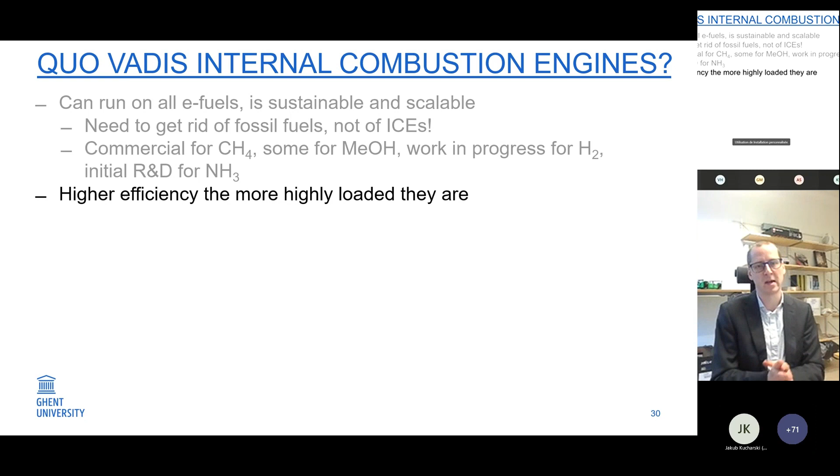What about combustion engines versus fuel cells then? Interestingly, we're talking not about small engines for your applications. Combustion engines have higher efficiency the more highly loaded they are, whereas fuel cells, there the efficiency drops with load. Also, the bigger a combustion engine is, the higher its efficiency. So for the marine derivatives of truck engines, for example, we're talking about over 45% efficiency. The medium speeds and the 2-strokes attain over 50% peak efficiency. So that's actually perfectly competitive with fuel cell systems. In my view, this remains the most likely prime mover for shipping also in the long run.

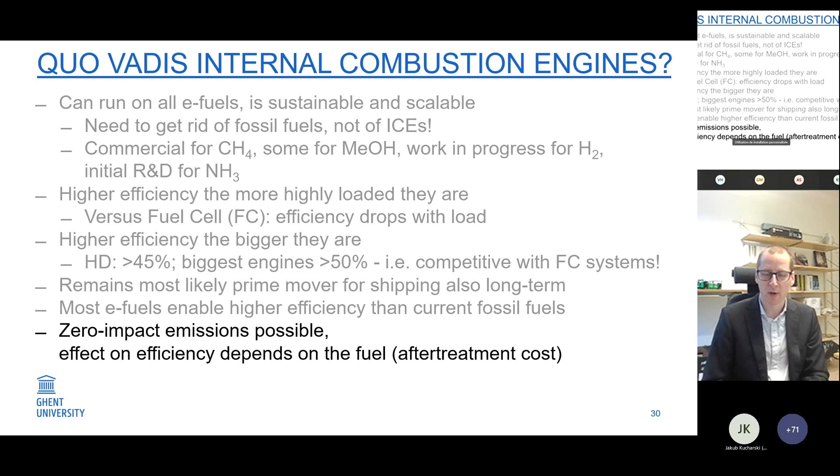On top of that, if we switch fuels, if we go to these e-fuels, we've also got experimental evidence now that we can get to higher efficiency than with the current fossil fuels. And then what about air quality? Well, zero impact emissions are perfectly possible. The effect on the efficiency then depends on the fuel - whether or not you still have some emission formation mechanisms, or you can completely avoid them, and so whether or not you need after treatment.

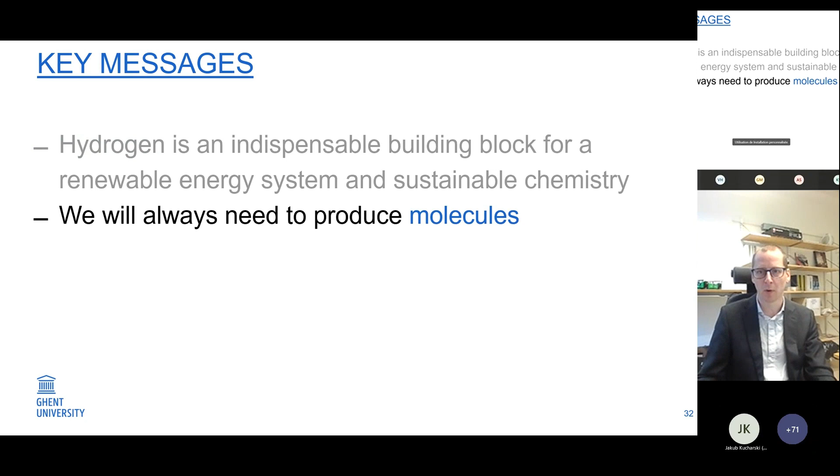So a couple of takeaways. Clearly, hydrogen will be an indispensable building block. Our renewable energy system will need to rely on something that we can use to buffer energy, and sustainable chemistry will need this as a molecule. So we will actually always need to produce molecules, to fuel heavy transportation such as inland waterway, but also as an input for chemistry. Which means that whether it's hydrogen or methanol or ammonia, we will definitely need to produce these things in the long run. Question then is, of course, which of these are we actually going to use as fuels?

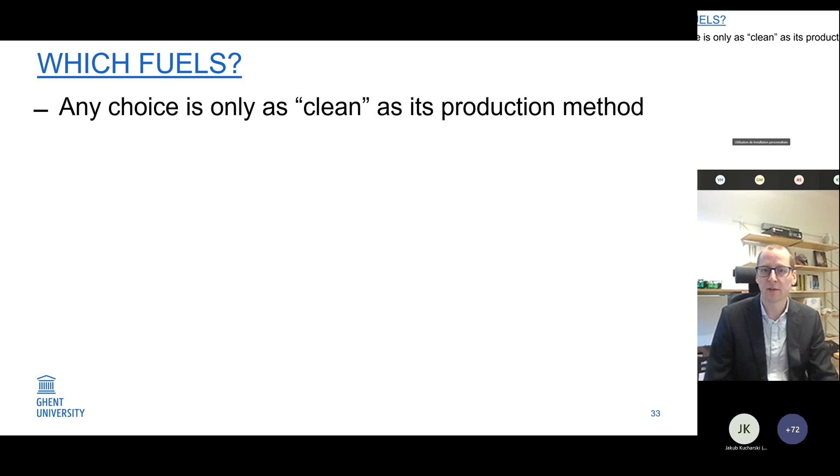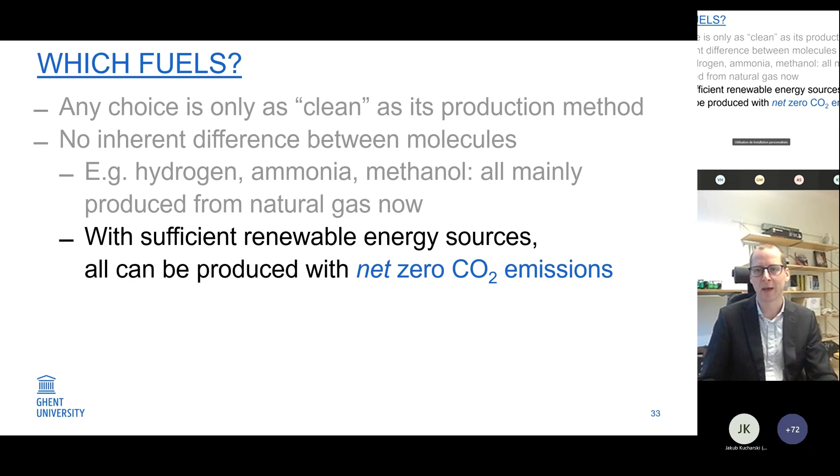It's quite obvious, but I'll state it anyway: any choice obviously is only as clean as its production method. So there's no inherent difference between molecules. Hydrogen or ammonia or methanol, if you look at today, they're basically all produced from natural gas, from fossil fuels. If we go to sustainable energy sources, we can produce all of these with net zero CO2 emissions, whether there's carbon in the fuel makeup or not. If we actually look at the chemical as well as the energy use of molecules, we will always need carbon and hydrogen and oxygen and some other things as well.

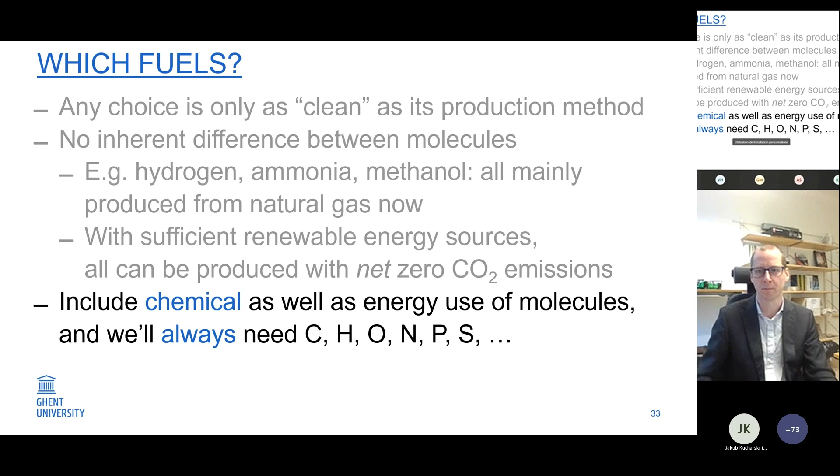So again, which fuels? Well, hydrogen's greatest challenge is its very poor energy density, so you immediately introduce a lot of losses if you want to directly use that as a fuel. So for a lot of applications, we really need a hydrogen carrier, a hydrogen vector.

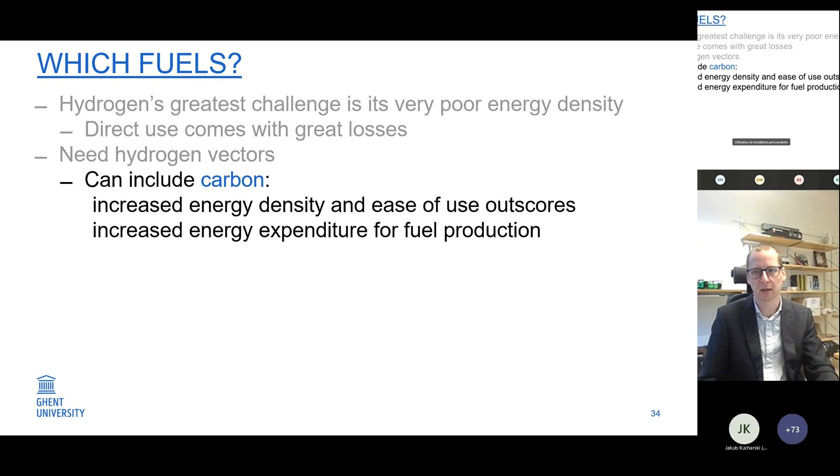And yes, that can include carbon. There's a good reason for actually including carbon, because we get increased energy density, and that comes with a greatly increased ease of use. That easily outscores the increased energy expenditure needed to produce a carbon-containing fuel. And obviously we'll always need carbon.

So luckily legislation had at least seen this for waterborne transports, that we need to look at this from a life cycle basis, so that it's not just about the tailpipe.

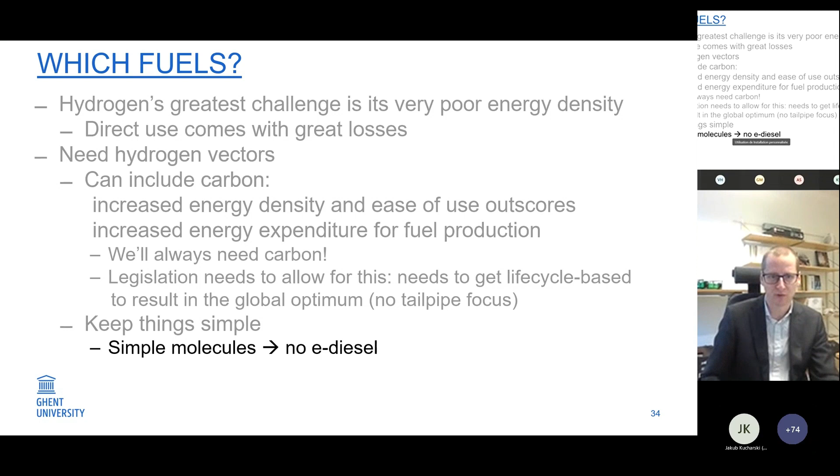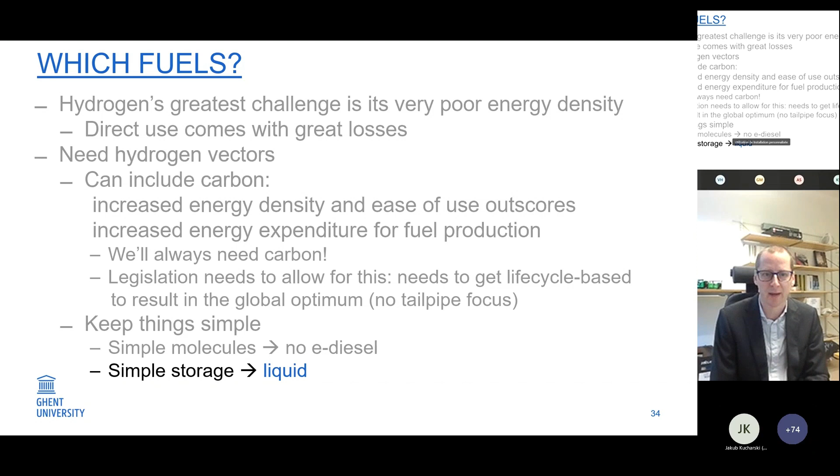My view on things is mostly to keep things quite simple. If we produce fuels, keep it as simple as possible. Yes, we could produce a green diesel, but why would we? Why not keep it simple? Because then we increase the production efficiency, and on top of that, we also increase the use efficiency. If we think about simplifying storage, clearly opting for liquid fuel expands the number of applications you can handle with that. And that means something like methanol is much more viable as a fuel than ammonia.

So where will we end up in the future with these things? I hope I haven't raised a ton more questions than you started out with. I hope I've given you a couple of tools to try to make the link between all these fuels we see popping up, and what this could actually sail on in the near future. So thank you very much for listening.